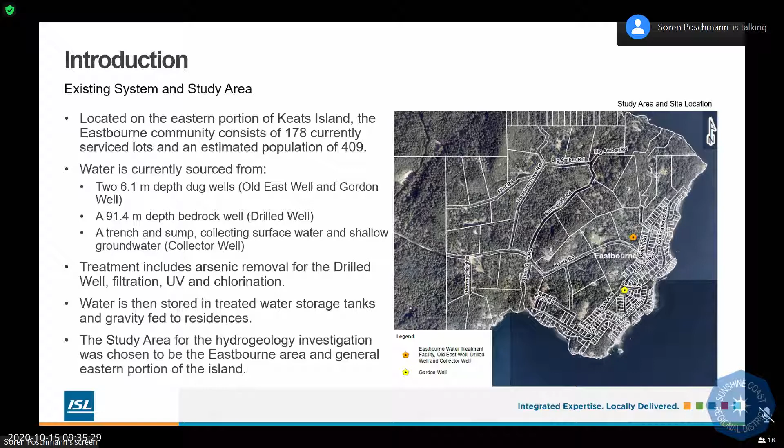So the system itself, Eastbourne, is on the eastern portion of Keats Island. Water source currently is 3 shallow wells. The Old East and Gordon wells are dug. The collector well is a trench and sump system, and then there is one deeper bedrock aquifer drilled well. There is water treatment for arsenic, as well as filtration, UV, and chlorination. Water is then pumped to treated water storage tanks and gravity fed to residences, each of which have their own tank on their property.

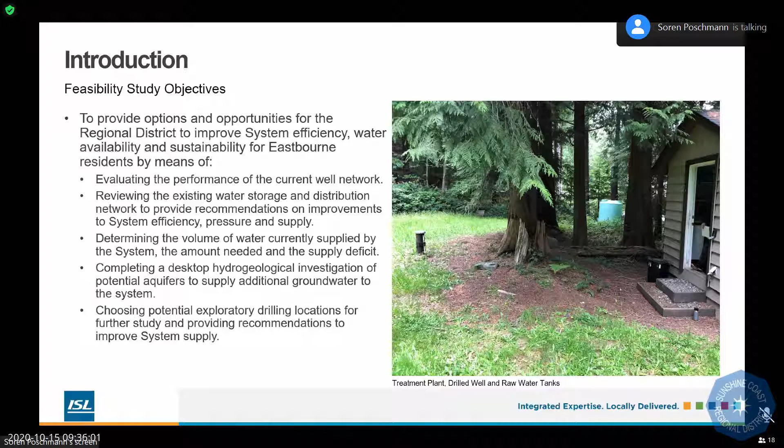Our objectives were to evaluate the performance of the existing wells, to review the water storage distribution networks, to determine the volume currently supplied by the system, as well as the amount anticipated to be needed, and then a desktop hydrogeological investigation, and choosing some potential exploratory drilling locations. Step one, we took a look at the existing wells. We had about 6.5 years worth of data of water levels and pumping rates. We completed this to take a closer look at how the wells were performing, both in the summer and winter.

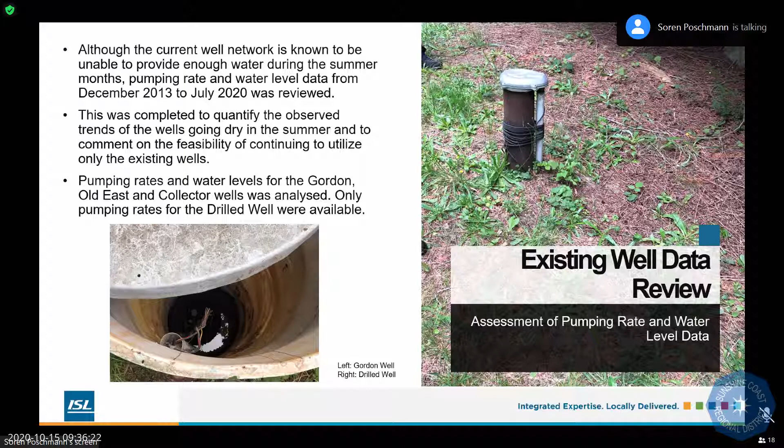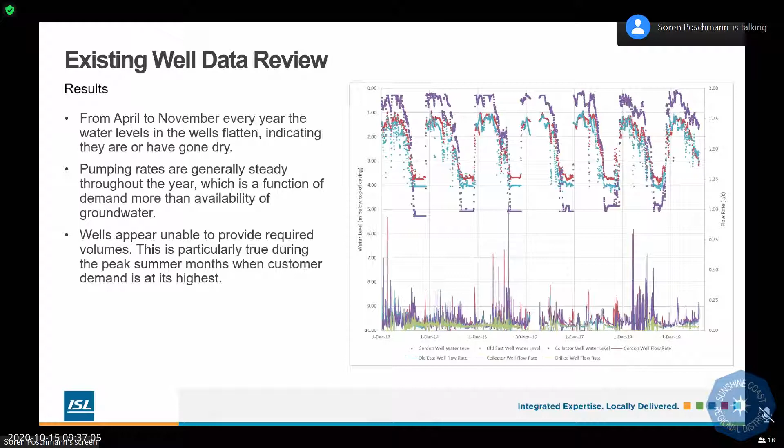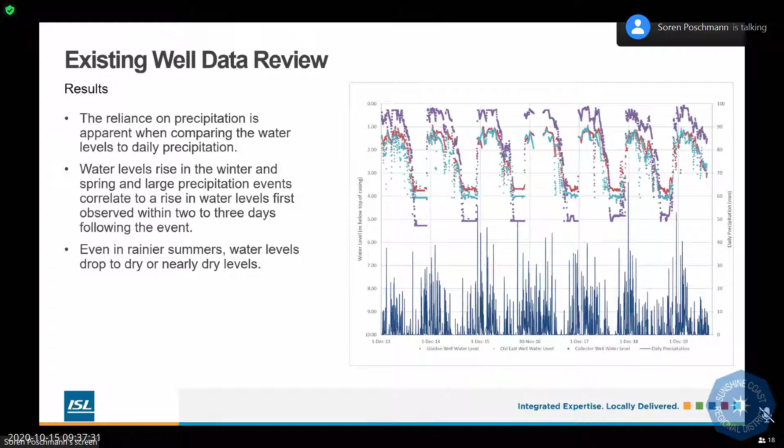To conclude this part, again, wells are going dry in the summer. To figure out exactly how much they can provide was a bit difficult. We made the safe assumption that the overall annual average, so the whole year average flow rates that the wells can provide, is probably about the max they can do. So that equates to 0.24 liters per second, which is an important number to remember.

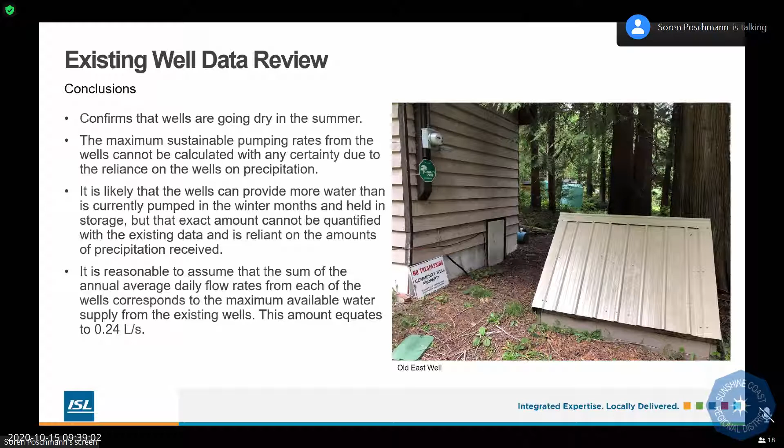So we'll talk about recommendations at the end, but just at this point, we're not recommending spending money to increase the capacity of these wells as it stands. It doesn't reduce your reliance on precipitation, and money is probably better spent looking at new sources. So we'll talk about that a bit later. With that, I will throw it to Sarah to talk about the engineering review.

All right, thank you, Soren. So the next step of the project was to perform an assessment of the water distribution system, which we did for both existing and future conditions. So this involved determining the demands for the current and build-out populations, finding the maximum and minimum pressures for these demand scenarios, and then noting any improvements.

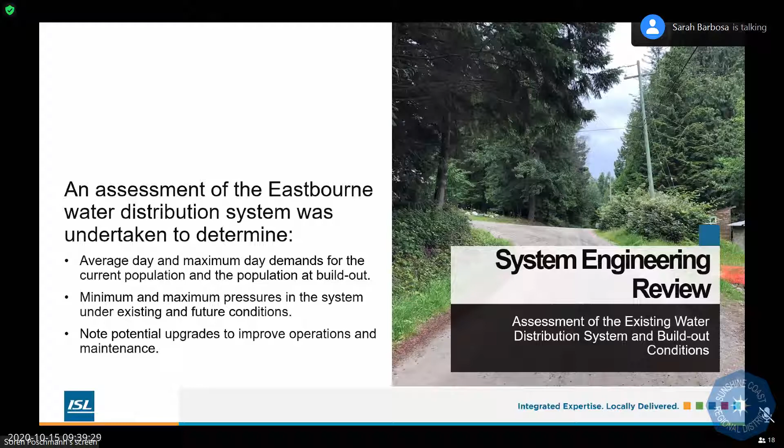And then just a bit of a summary regarding the existing Eastbourne water system. So it's comprised of 5.5 kilometers of distribution mains, ranging in size from 25 millimeters to 50 millimeters. All of the 25 and 38 millimeter water mains are comprised of PVC, and the 50 millimeter water mains are comprised of HDPE. And also just a note that the system isn't currently set up to supply fire flow protection, just given the size of the existing water mains, the lack of a fire pump or the available water supply, and also water storage deficiencies.

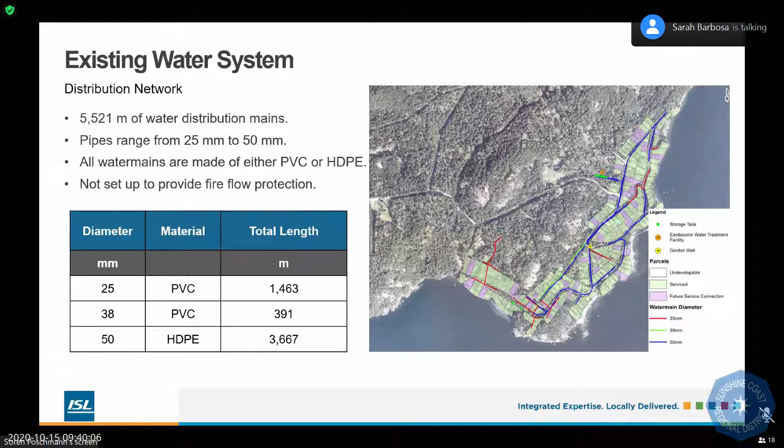In terms of potable water storage, there's 7 totes for a total capacity of 52.5 cubic meters at the water treatment plant. There's also 2 storage totes in the community, and they're able to hold a total capacity of 22.5 cubic meters. And then, as Soren already mentioned, each property has their own on-lot storage tanks.

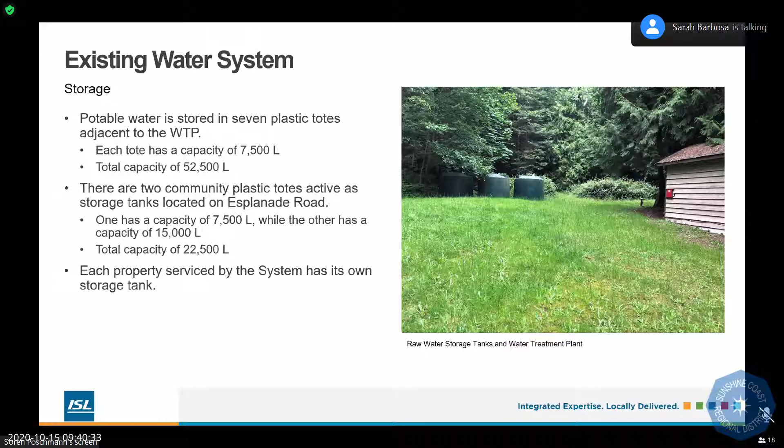So based on the historic Eastbourne water system data that was provided to ISL, we were able to determine the daily demands through the available distribution data. So we calculated an average daily demand of 0.22 liters per second, which was also cross-checked against the pumping rates, the average annual consumption, and the comprehensive regional water plan. So we found that the maximum day demand was generally about 0.45 liters per second based off of the historic data. And this also agreed to the derived flow of 0.44 liters per second, which we calculated using the consumption rates and the peaking factor.

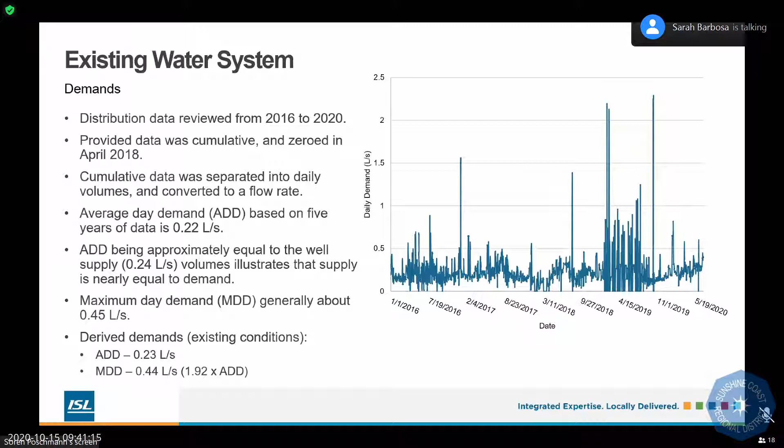We ended up building a new model from scratch and used the existing small systems model just as a reference. And we did this just because of the age of the existing model. So we had noticed some discrepancies between pipe sizing, alignments, missing infrastructure, and we also wanted to make sure that the demands were up to date. So we used WaterCAD by Bentley for the modeling process.

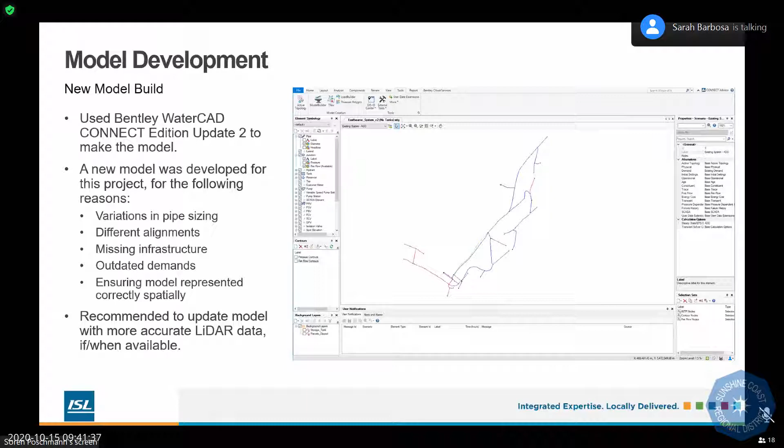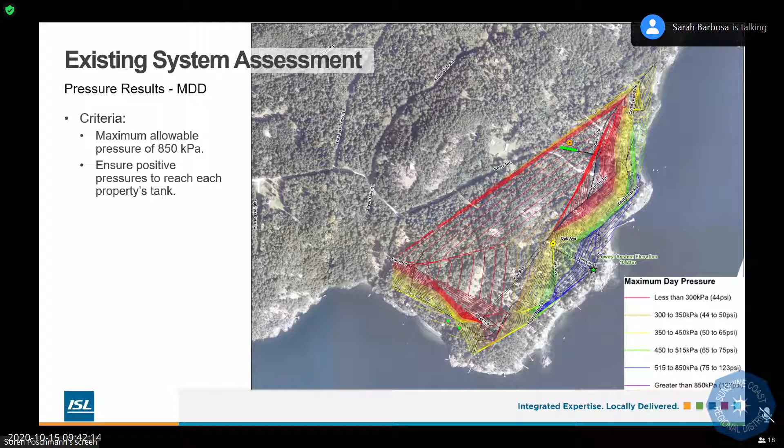In terms of the pressure results, what we're looking for in the system is ensuring that there's positive pressures at each parcel, and then also ensuring that the distribution mains don't exceed a pressure of 850 kPa. So basically what we're seeing here is that the distribution system is performing adequately under average day demand conditions. And similar for MDD, it's not too different from ADD. We're still getting the same trend, generally with the conclusion that pressures are adequate under these conditions as well.

So under future conditions, an additional 38 lots were added to the network, which resulted in an additional 87 people. So this gave an additional demand of 0.05 liters per second under the average daily demand conditions. So the total maximum day demand flows were equivalent to 0.54 liters per second. So the pressure differences between the existing and future conditions are quite minimal. There's only an increase of 0.05 liters per second, which isn't overly significant. So this also just shows that the system is performing adequately under future conditions as well.

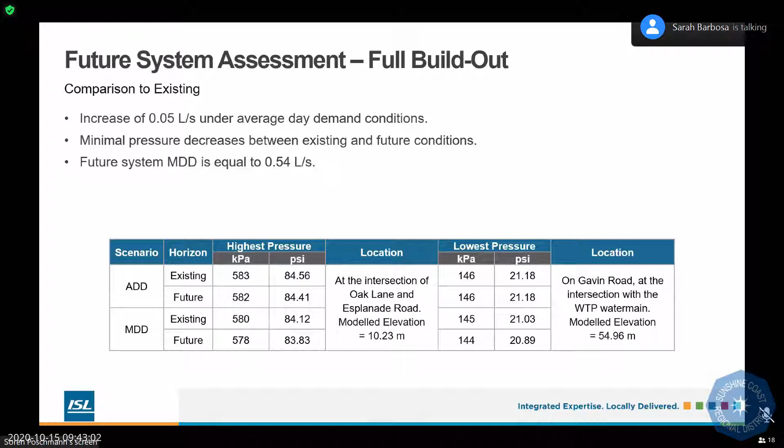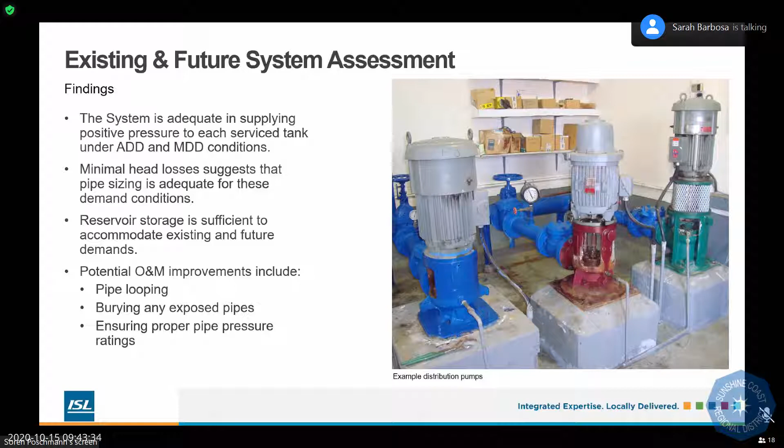And just a summary of our findings from the existing system assessment. So the distribution system adequately supplies pressures to each residence tank, while also not exceeding the maximum pressure of 850 kPa. There's also minimal head losses through the system, so that indicates that the pipe sizing is adequate. And the reservoir storage was also found to be sufficient. And then we also just noted a couple of operations and maintenance improvements to the system, which are further described in the report.

And with that, I'll pass it off to Soren. Thanks, Sarah. So from that, we move to determining this supply deficit.

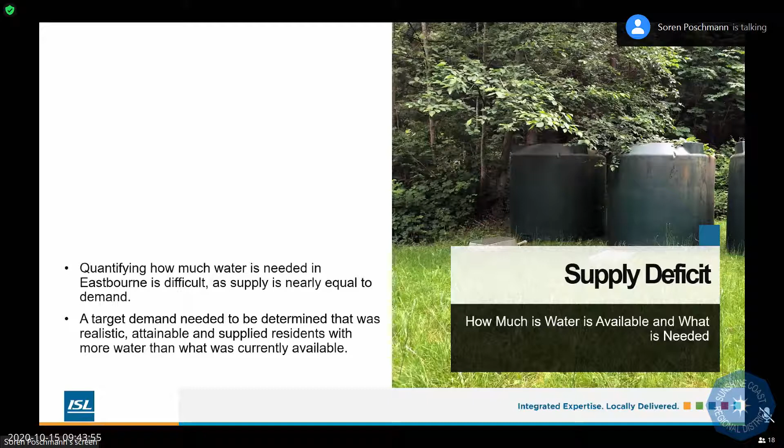So what that is, is the difference between how much water we can currently supply and how much water is realistically needed. So this figure here illustrates that. As I talked about, the current supply we figure can supply about 0.24 liters per second between the 4 wells. As Sarah calculated, the target demand of 0.54, we picked that to be a realistic and attainable target demand.

So this 0.54 is still quite low. It's not quite equivalent to what other regional district systems provide, but it is realistic and attainable, as I mentioned, and it would more than double the existing water supply in Eastbourne. So the difference between that is 0.3 liters per second, and that supply deficit is what we were after in terms of making up either by means of storage or a new source or a combination of the two.

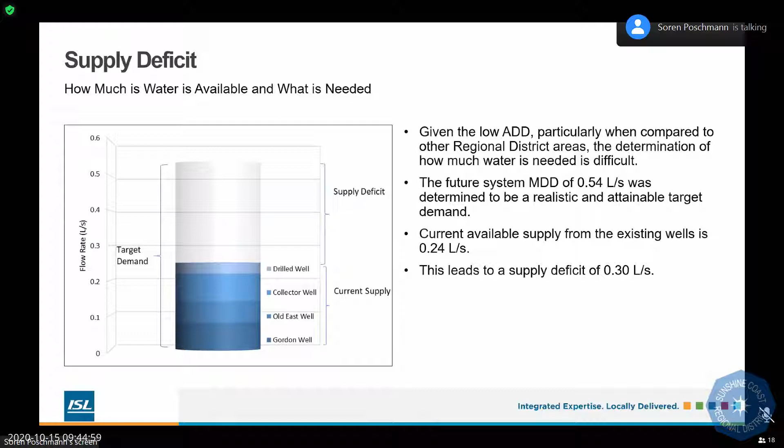So on the storage side, we did look at the possibility of pumping more from those existing wells in the fall and winter when they can provide more, when there is more precipitation. To do that, though, only using the existing sources and pumping all fall and winter, you would need about 4,000 meter cubes of additional storage. So that is equivalent to about 500 more of these tanks. So a lot of storage. Or it's about equivalent to the 2 concrete reservoirs on Reed Road. So a lot of storage would be needed to only do that.

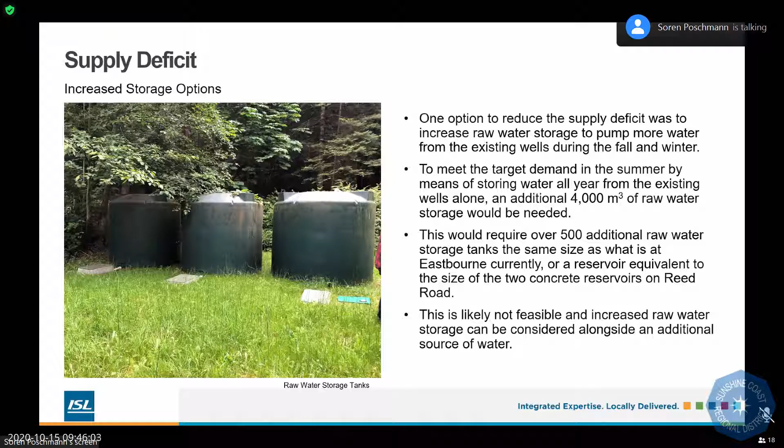So likely not feasible. Some additional storage is recommended that we'll talk about, but in parallel with an additional source of water. Continuing to utilize the existing wells just in the fall and winter doesn't reduce the reliance on precipitation. So with that, we took a look at potential aquifers to use as a new source. So I'll just go over this quite briefly.

The province mapped 2 aquifers in Eastbourne. The blue one we see here corresponds to that shallow sand and gravel that the existing wells are in. The flow in that is likely completely tied to precipitation, so not an ideal candidate to continue using. The deeper aquifer, the pink one, which would be underlying the blue as well, is fractured bedrock. The drilled well is likely in this.

However, in this aquifer, the flow is dominated by fractures in the bedrock. So that drilled well likely didn't intersect a good fracture network, whereas some of the other ones on the island have. So the main risk for drilling new wells in this aquifer is really just intersecting those fractures or not. And there's not really enough data to predict with any certainty where those fractures are.

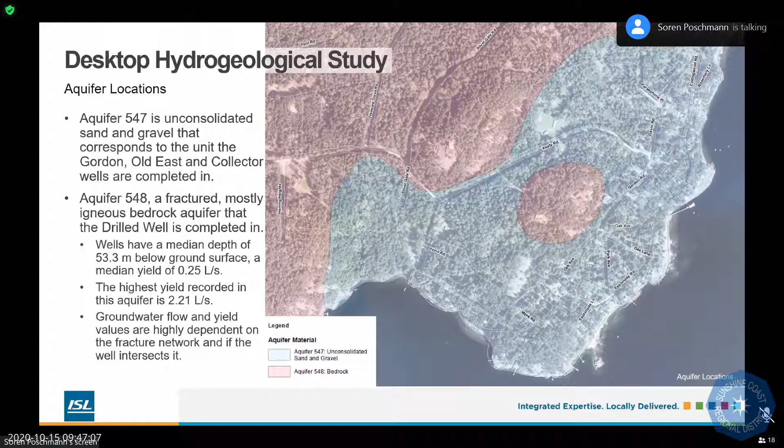Quickly, we did look at existing well records and licenses in the area. So there are some privately owned wells on lots. We didn't look at these in detail, discussing them with residents, as it wasn't really part of our scope. We just looked at the well record, but we did send a mail out to residents with the results of our study, so if anyone has any feedback, they would be encouraged to contact the regional district through that mail out.

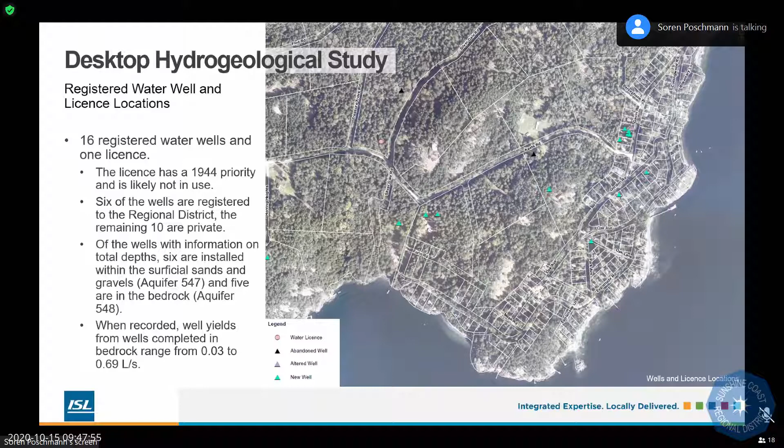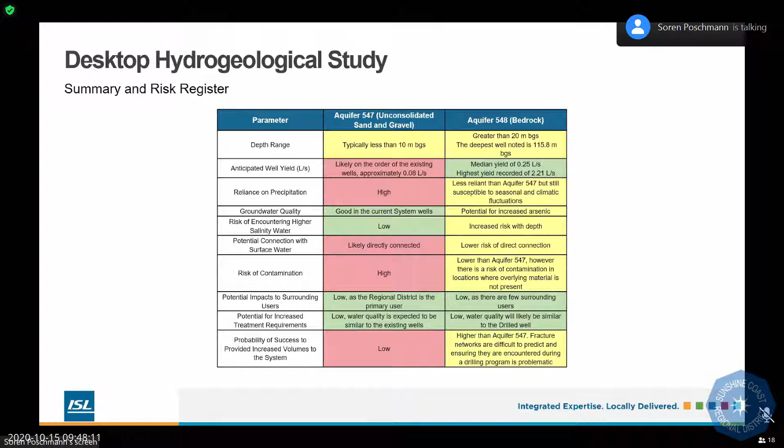The look at existing wells just kind of backed up what we saw, in that the fractures in the bedrock are the main drivers of flow and higher yielding wells. This table summarizes the two aquifers. The color coding, generally green is low risk, yellow is moderate, red is high risk. So we can see here that the bedrock aquifer is the preferred target.

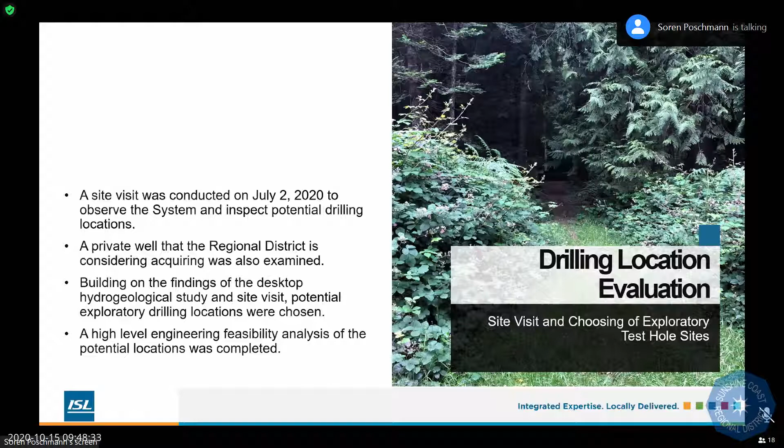Moving to choosing drilling locations, in addition to inspecting a couple of potential locations, we also took a look at a private well that was recently drilled that the owner has approached the regional district to potentially acquire. So we'll talk about that a bit as well. Let's see a picture of the private well and a couple of the sites we inspected to drill. So this private well is pretty close to the treatment plant.

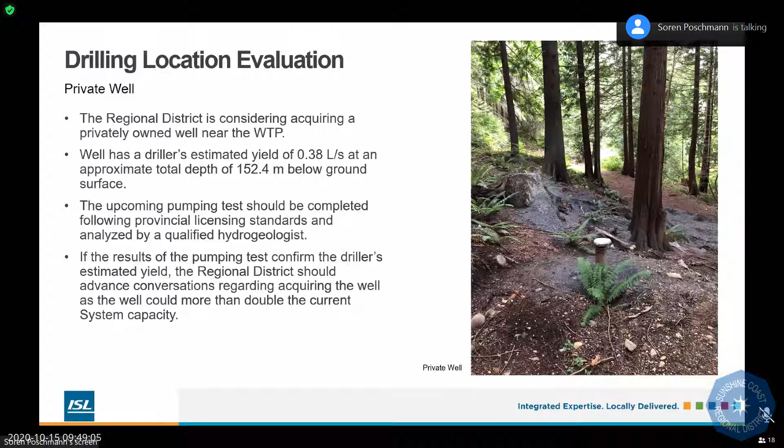The driller estimated the yield at 0.38, so a pretty good well. We're currently in the process of conducting a pumping test, or we will be in the coming weeks, to confirm that estimate. So the results of that will go a long way in recommendations for next steps on whether or not to acquire this well.

On top of that, we chose 3 drilling locations. You can see them labeled 1, 2, 3 up here. So these locations were chosen based on land ownership. Most of the land out there is privately owned, so there were only a few spots that we could drill and potentially get easements on. Locations of septic fields, being far enough away from those, closer to some higher yielding well locations, and they're also upslope. So less potential for contamination as well.

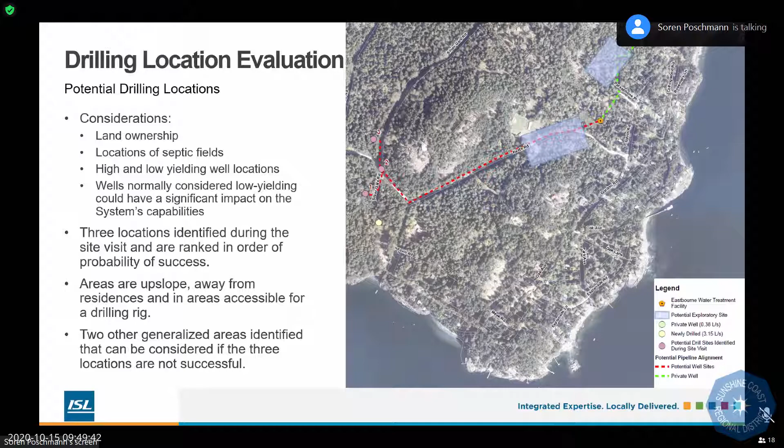Those 3 locations and the private well, we looked at the feasibility of them and some high-level estimated costs. So basically all 4 locations were feasible from an engineering perspective to tie them into the treatment plant. The estimated costs are quite high level at this point, in particular for the 3 sites. They don't take into account the cost savings that you would get from only having 1 drilling rig mobilization, and also include a 30% contingency. But the private well costs also don't take into account whatever the cost of acquiring that well would be, but clearly that well is the most cost-effective option to add to the treatment plant because it is installed already.

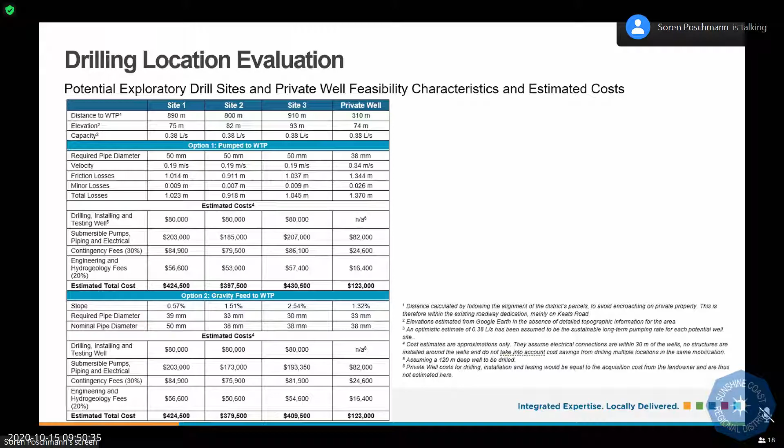I'll wrap this up. Some conclusions. The existing wells are going dry. The drilled well shows diminished capacity. So the existing wells can only provide about 0.24 liters per second. Sarah's work on the modeling of the system shows it's currently inadequate, both to meet existing demands as well as the future target demand.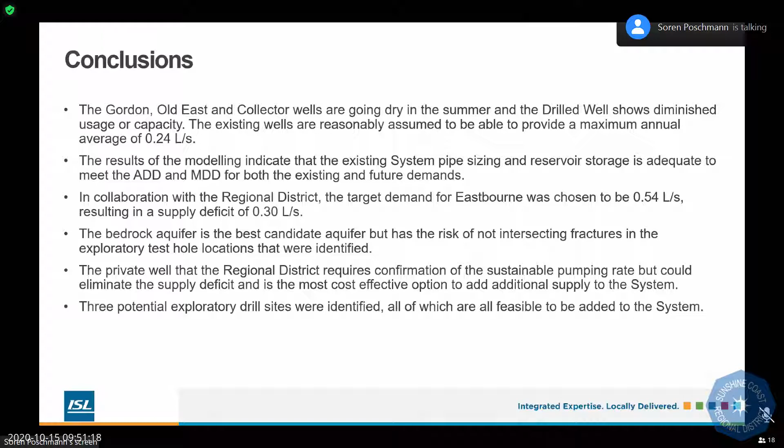The target demand was chosen to be 0.54, so there's 0.3 liters per second that we need to make up to meet that demand. To make that up, the bedrock aquifer is the best candidate aquifer. The private well is another good option. And on top of that, there's 3 drill sites we identified as well.

Recommendations. So first and foremost, analyze the pumping tests that we're going to be doing on that private well to determine next steps for that. If it does look feasible to provide enough water to the system, or even an additional component of making up that supply deficit, then the recommendation is to advance negotiations to acquire that well.

On top of that, we are recommending that at least 2 wells are added to the system. So 2 wells are chosen, and regardless of if one can supply the entire supply deficit, we are still recommending 2, and that's primarily for redundancy, and it also helps reduce reliance on precipitation and mitigate some impacts of climate change on those existing wells. 3 of the 4 wells are pretty much fully reliant on precipitation, so particularly in dry years, that 0.24 liters per second that they provide realistically might go down in the summer and in times of drought.

So 2 wells are recommended, either the private well and 1 new one or 2 new ones. That kind of remains to be seen. But the recommendation is to drill the locations in order of priority that we identified. And it's recommended too for budgeting to assume you're going to drill all 3 locations just for cost savings for rig mobilizations. Drilling 2 wells also reduces costs for license applications. You can get the water rights sooner in time.

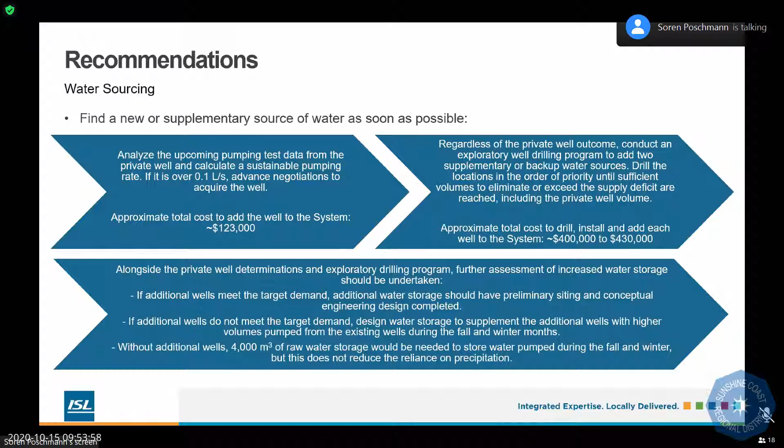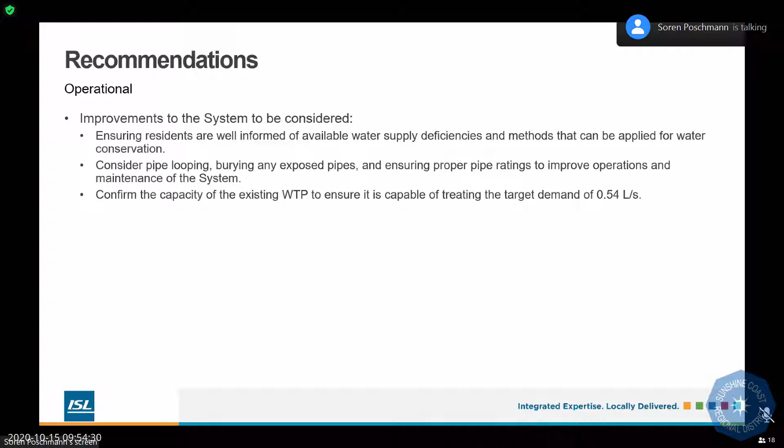Finally, a couple last operational recommendations. Sarah mentioned a few of them, but really ensuring residents are well informed of the realities on the island with water supply and water conservation methods. So like I said, the mail out went out summarizing the results of our study. And confirm the capacity of the treatment plant as well to ensure it can meet the demand, and that can be done alongside the storage work as well. So with that, we would be happy to take any questions.

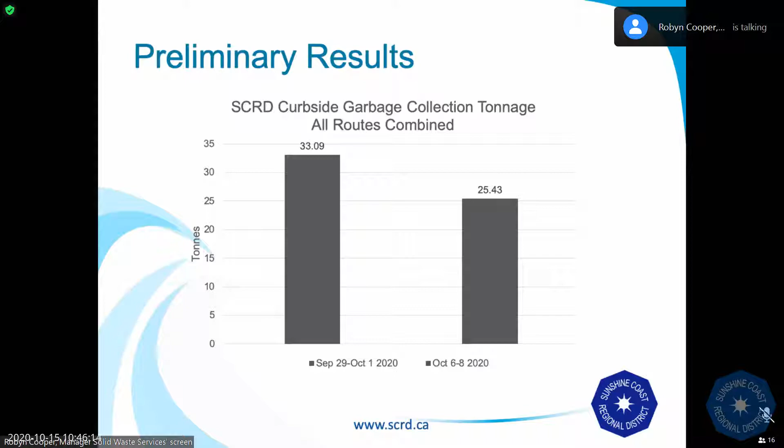We had staff, one PMAC volunteer, as well as the Wild Safe BC coordinator conducting some participation surveys last week and this week, which are the first 2 weeks of service. From waste management and Salish Soils, no major concerns at all with contamination, which is great news. Some things that were found inside of the green bins were some pet litter or pet waste and some recyclables. For example, some magazines or cereal boxes were found.

In those cases, if the materials could be removed, then they were left behind and the food waste was emptied. Otherwise, it would have been tagged and left behind by waste management. And then at Salish Soils, really the only things we saw were some produce stickers, as well as some packaged food. For example, there was a full bag of potatoes that was still in its plastic packaging.

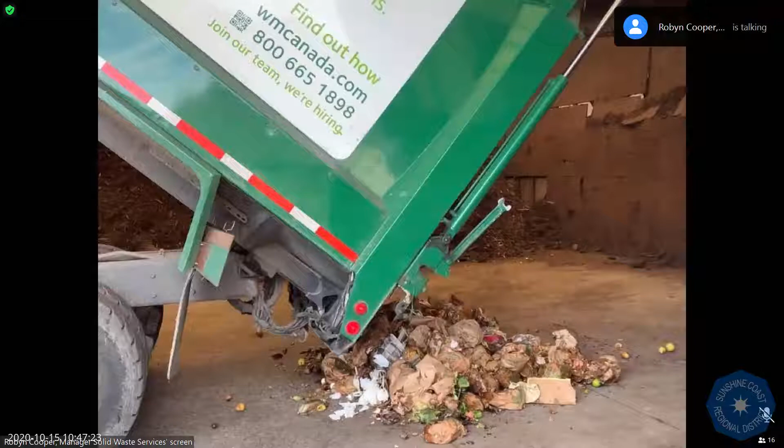Feedback to date: we're receiving feedback via phone, via email, as well as on social media. In terms of inquiries, we have received positive feedback around the guide and the program itself, questions around what's included in the green bin, which connects back to our frequently asked questions. We have had some opt-out inquiries, questions around what types of bags can be used and where to purchase the paper bags. In terms of the container, we have received some feedback that it's too large for the amount of food waste being produced. Feedback around wildlife, specifically bears that have accessed some green bins.

We also have received some serious concerns from residents regarding every other week garbage, related to both volume and frequency. Some residents are saying that they're diverting all their food waste, recycling everything they can, and they're still producing one garbage bag per week. So that's a volume concern, and a frequency concern would be not wanting to store the garbage for 2 weeks. And we have had quite a bit of interest in curbside recycling.